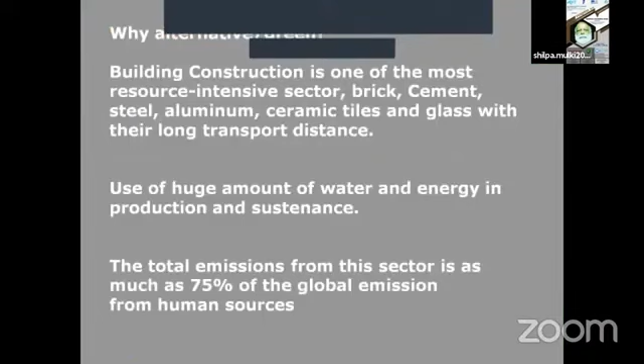So you can. Subasa, am I audible? Yes. Clear, right? But I'm not. You have to put the screen on. Yes, sir. You can see me on the screen? No. No? No, it has changed. I think something. Okay.

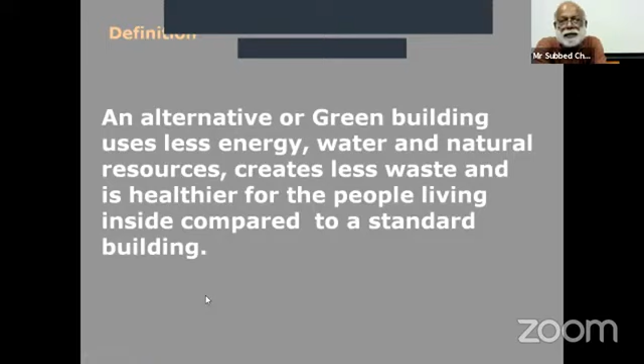Next. So now the question is, why do we need to get into this whole area when everything is going smooth, although we know there are problems with the environment and other things?

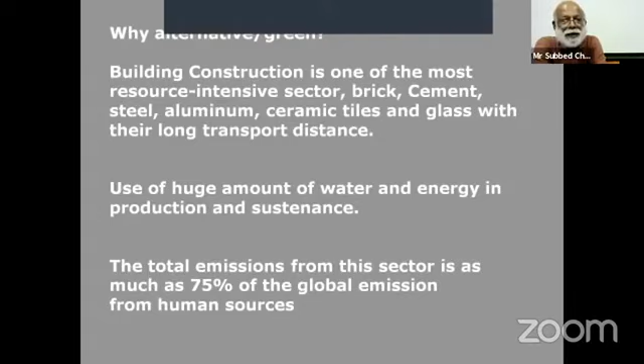Building construction is one of the most resource-intensive sectors, where brick, cement, steel, aluminium, ceramic tiles, glass, and all this material are transported over long distances and processed in large industries, which consume huge amounts of energy and water for their production and sustenance. It also consumes huge amounts of our pristine forest area.

The total emission from this sector sometimes goes up to nearly 75% of global emissions. Although as architects and engineers we always behave as if we are doing great work for society, each of our decisions and selections of material actually leads to a lot of different kinds of impact on the global environment.

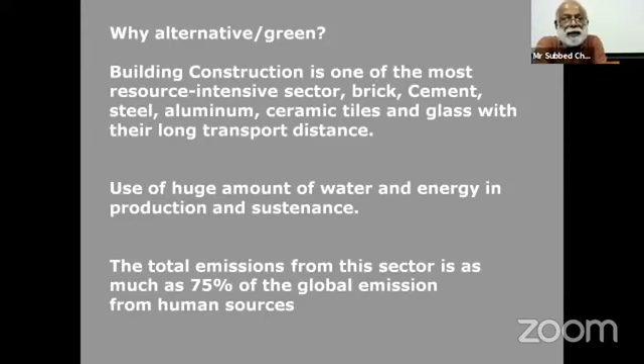Now, this also brings out a huge number of people from the rural hinterland to the urban areas. The urban areas are also an outcome of the kind of development that we are talking about. And then we don't house them properly, so they somehow manage to live on the outskirts of the cities, and they are the people who actually build the cities and the kind of developed world that we see.

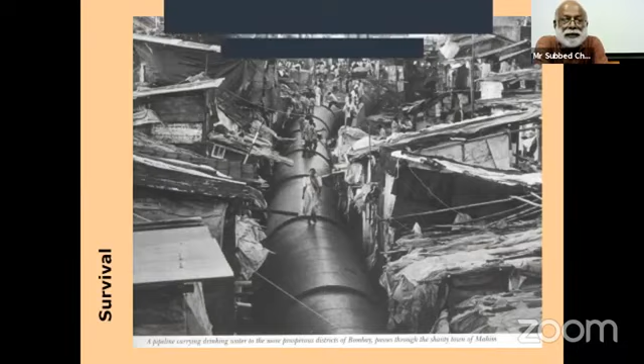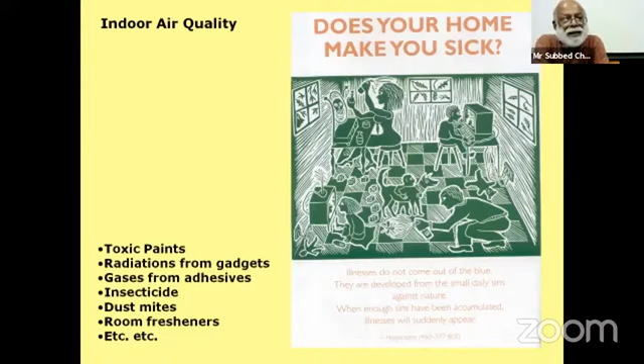But the people, those who are building or living in large apartments or houses, are we all living a very healthy life? If we look at the picture, we'll see that we are actually surrounded with toxic paints. We have radiating gadgets, gases from adhesives using toxic gases, insecticides, dust mite, room freshener, everything has a kind of bad health impact on us. Now, this is the kind of indoor space that we create.

And the model that we have in our mind, particularly our politicians and engineers and technocrats, those who go abroad and come back with this kind of image that you see, is that we like our cities to be like that.

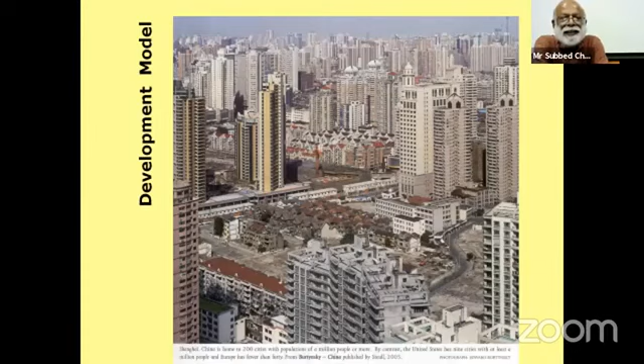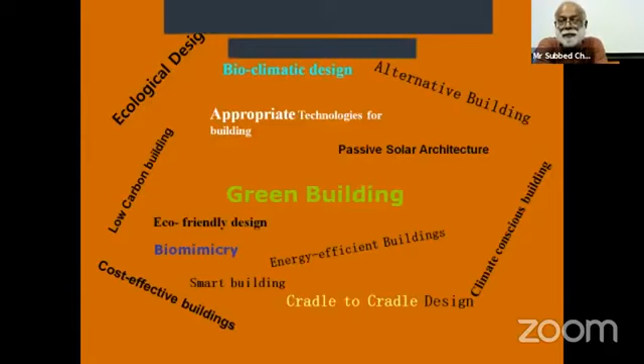Now, then there are reactions, and we start thinking about how to correct it. So lots of new ideas come into picture, and we name them in different ways. Somewhere we call it ecological design, low cost, low carbon building, green buildings, eco-friendly designs. But they are all different names for the kind of things that we like to achieve, to solve the problem of what we have created ourselves.

Now, the whole issue starts technically with the energy in building. One type of energy is embodied into our building. The type of building that we see, the steel, concrete, and all this, has got a huge amount of energy embedded within. Then we have the energy used during construction.

Today, we use a lot of equipment and heavy machinery to erect our buildings. Then we have operational energy for services like lighting, ventilation, and AC, and all those things which are very common now for our lifestyle. Then we have maintenance and alteration—those buildings need a lot of it. And then lastly, energy for demolition and recycling. All those things. Now, see, we have created such a huge problem.

And this energy, ultimately, whenever we consume it, we actually throw off a lot of waste energy, which heats up the whole environment. So it is very essential for us to select what technology we will use, what material to be used for future construction.

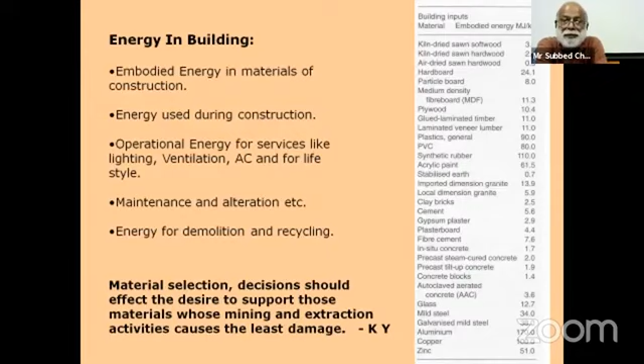Now, in the process of extracting this material, we are actually creating a huge scar on the face of the earth. Somewhere we are scooping it out, somewhere we are tracing it out. And as we look at the earth from the top, we see all these things happening all around our cities. What we are doing is a kind of exhausting the finite resources of building material.

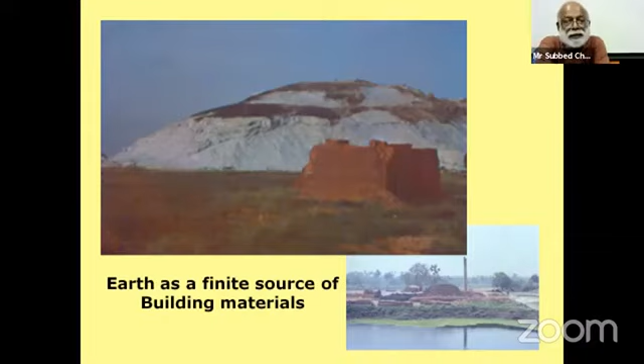But do we have a way to come out of it? Now, we do have vernacular wisdom. We still have our villages where we can go back and look at the way people lived for hundreds of thousands of years. They do have some kind of understanding of their local climate and material and its performance. It is worth still looking at some of them to draw some kind of inspiration from.

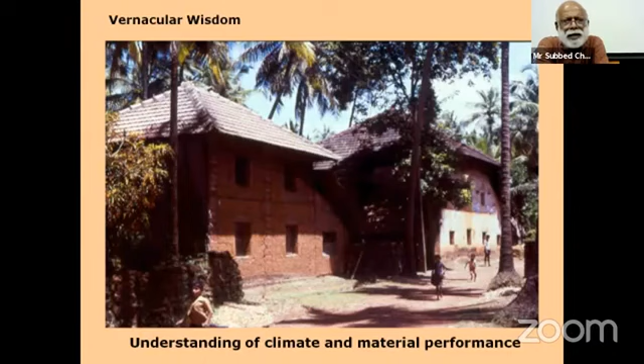Now, there are examples where people, those who have set these things for us, have provided examples for us, and perhaps Gandhi, when he decided to build his own ashram in Wardha in 1936, used local material like bamboo, mud, and tiles for his own ashram. And that is still very much there at Sevagram Wardha, which one can look at and draw inspiration from.

Next. There are buildings also which are big and multi-storied, and one such building is a guest house in Sri Aurobindo Ashram, and this is known as Golconde.

And this is one building again which has a tremendous impact on us, because it actually responded to the climatic context that we have. It can open up from everywhere to provide the ventilation, which is a very important need for a hot and humid climate. It's not the AC which can solve all our problems, but without much energy, we can still negotiate with it. This example shows us that. Next.

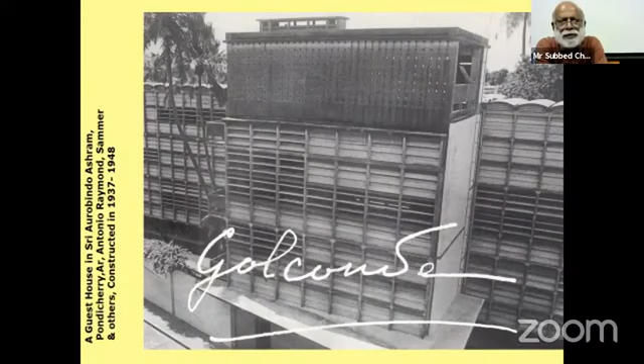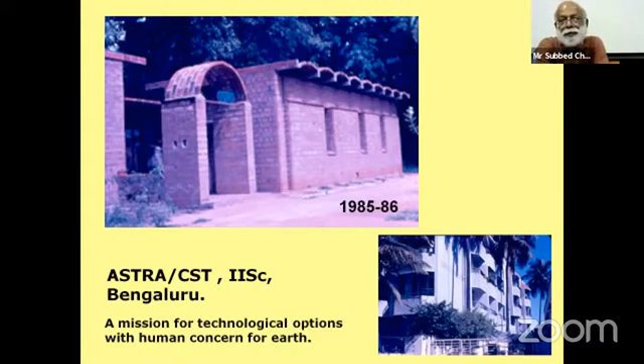Now, in the 80s, we have a group of professors from the Indian Institute of Science, IISc. They formulated a group called ASTRA, which is known as CST nowadays. They started working with some of the technologies and ideas which perhaps can help us to come out of this, or to solve partly some of this problem. And I happened to associate myself early with this group in the 80s. Next.

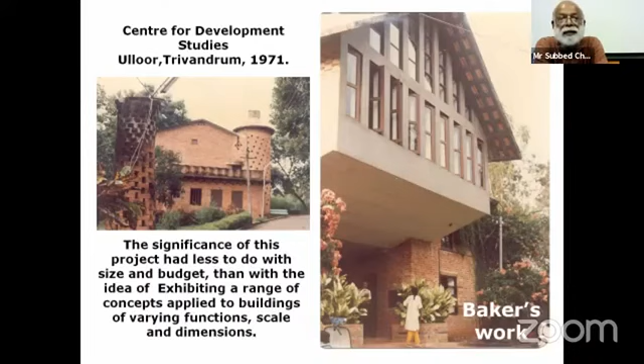There are people who also have set the stage for us. Laurie Baker is one of them. In the 70s, he started working in Kerala. He contributed quite a lot in terms of his work, and he has done a lot of building using efficiently the local resources like brick and tiles. So again, to respond to the local climate, these buildings were open enough for ventilation, things like that. So they worked as a very important exploration for us to draw inspiration.

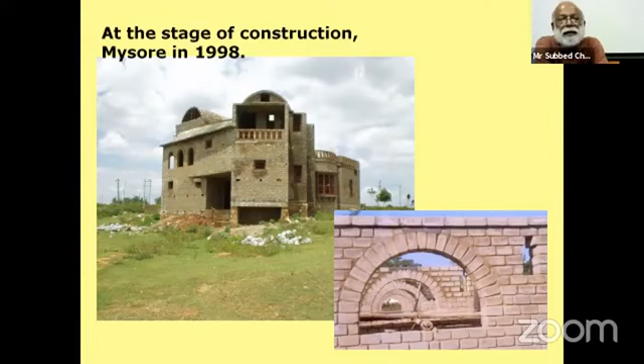So then onwards, we have our own buildings coming up in different places of Bangalore, Mysore, and other places. Next. Here's one example from Mysore. You can see the vaulted roof, you can see mud block, which we'll discuss later. Next. Next.

There are lots of other issues starting with the building and building materials. One of the things is water. We have a problem of water, and we don't sometimes think that we are creating any problem by building a different way. But if we look at the consumption of water in production of these materials, like 1 ton of cement, which consumes 3.6 tons of water, or 1 ton of paper, which consumes 270 tons of water. Steel uses 300 tons of water.

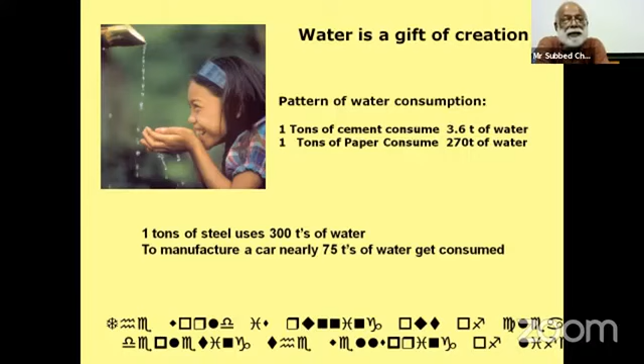Now, these are something which is very mind-boggling, basically because very rarely we have time to look at some of this information to understand what kind of problem we are creating for society when we use this material, or rather misuse some of this material. Thanks.

We do have quite a lot of faulty designs in our buildings, like the toilet system that we have, the WCs, which consume a huge amount of water, the water which is very precious, treated for us. This huge amount of water is used to push the solid material out into the pipe, ultimately into the sea or river or wherever it is. Very rarely it gets treated. So we need to think about the type of use of water and all these things, and it all originates from inside of buildings. Next.

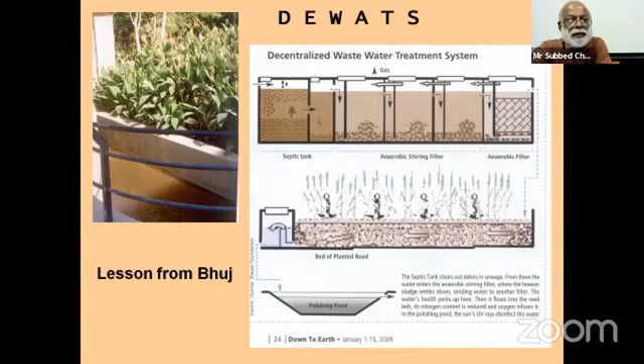We do have new ideas coming up to treat some of them, and we need to look at some of these things for our future. Next. We need to relate it with our food production. We need to have kitchen gardens and other things so that we can consume locally.

We need to also think about how we travel to our workplace. I think the pandemic has taught us this lesson. We were all talking about working from home. This is the time that has forced us to look at these options. So we can select these options of working in a place which is very close to our office, and work as much as possible to reduce the amount of vehicles operated on the streets. Next.

Next. The kind of city that we create by following the Western model, particularly using vehicles and traveling to the office, creates a huge amount of parking lots all around the city, and it demands these spaces. Now, if we work from home, we'll suddenly realize that our cityscape is changing, and that is something which can happen in a better way. Next. But there are interesting examples also coming up now. Next.

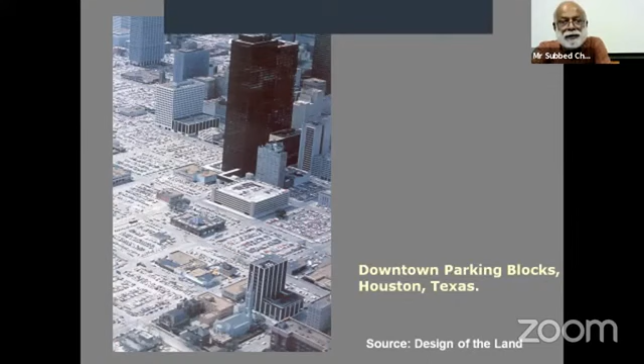You have smaller countries, those who have opened up these issues and created a lot of interesting situations where people can ride bicycles within the city, where the roads are blocked for traffic and opened to the walkers and the bicyclists. So these are some of the hopes that we have for the future. Next.

Ultimately, we are looking at a situation where we would like to have a green city, but we have to go through the green neighborhood, and it starts with green architecture. So I'll come back now to the architectural part of it. Next. Next. Next.

Now I'll start with the journey, my journey with Gram Vidya. Gram Vidya is an NGO which is dedicated to building research and training. It started in 1988, and today we are still working on it. Next.

So we will look at certain technologies and their contextual adaptation, which is meaningful based on the context that I have created with my earlier presentation. In our center, we are looking at earth-based walling materials and construction techniques. And we are also looking at different developments of masonry roofing techniques like domes and vaults, improved RC roofing techniques, beams and panels, and ferroconcrete. So these are some of the things I will touch upon, mainly by way of example, not going into the intricacies of the technology. Basically, that would take a long time. Next.

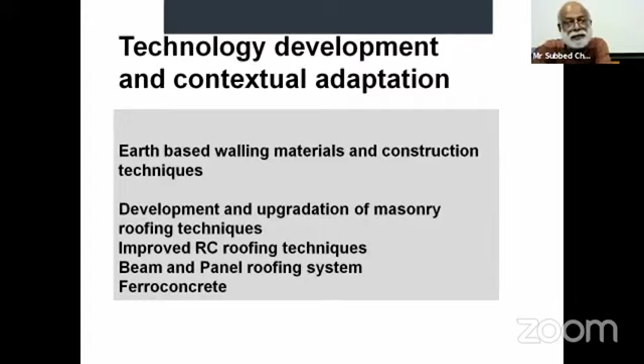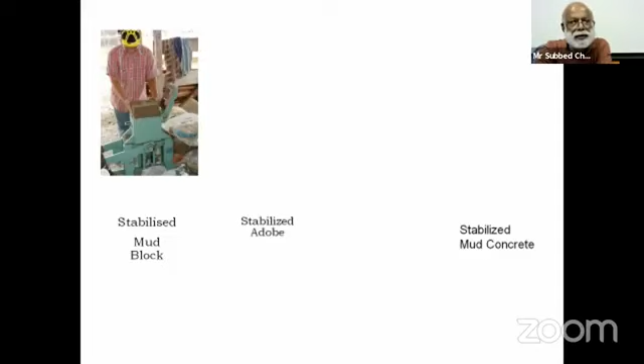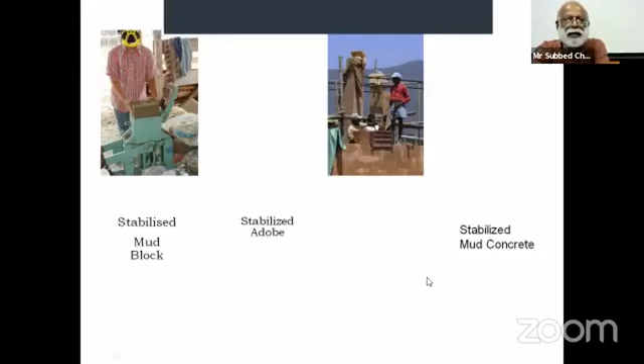So the kind of thing that we are working on starts with the stabilized mud block. Next. Stabilized adobe. Next. It also covers rammed earth. These are different techniques using mud or earth as a basic raw material, and stabilized mud concrete at the end. Next.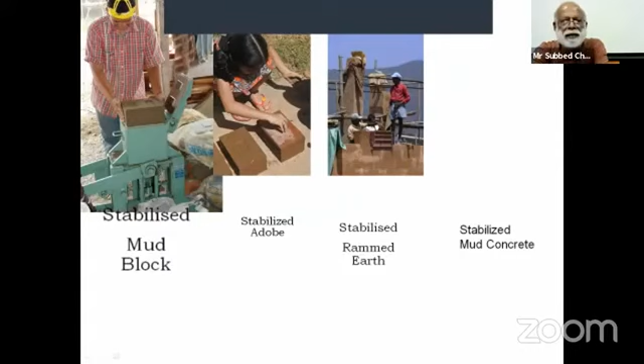We'll discuss now a little about the stabilized mud block. This is an earth-based product, which is actually compressed earth using a hand-operated machine. Next. With stabilization, which is in the form of around 7 to 8% of cement and a little lime.

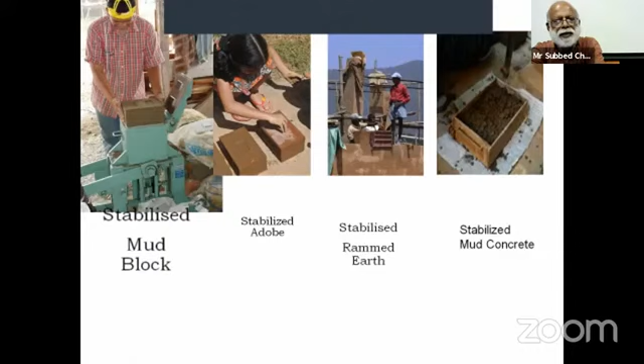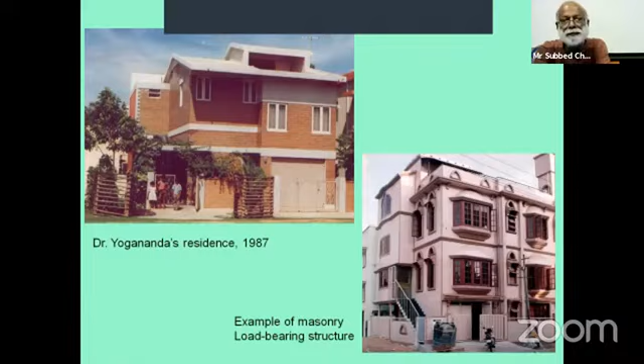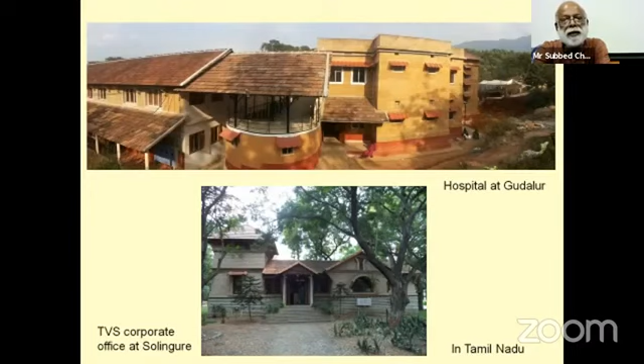Next. This is also to show you that this material can be used even for buildings like hospitals. In this case, it is 2-story hospital blocks in Gudalur, which is a high rainfall area in the Nilgiris. We also have a corporate office in Solingure, which is a group of people's office building. So you can see the acceptance in the corporate sector. You can see its acceptance in the NGO sector, where we're doing hospitals. Next.

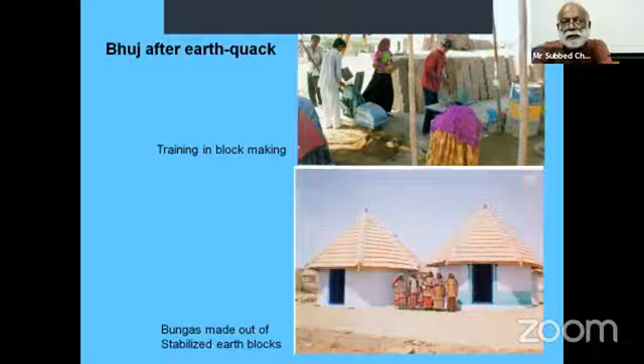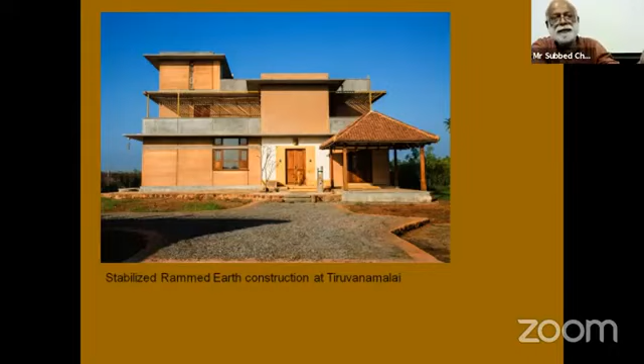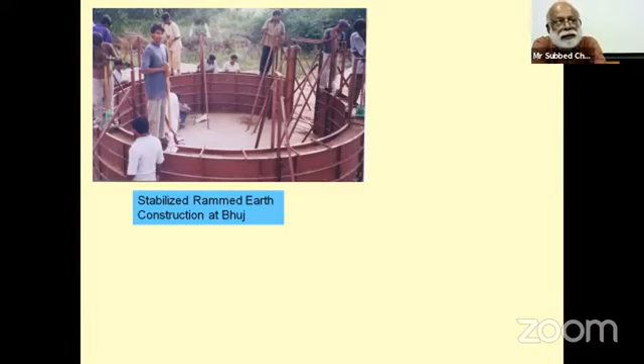Stabilized rammed earth construction in Tiruvannamalai for a residence. Next. Rammed earth is also used in Bhuj, where the whole house could be built with simple formwork. And since it has been used thousands of times, they could actually create a single formwork for the whole building. Next. And they could build the bunga, the traditional kind of house construction. Yeah. Next.

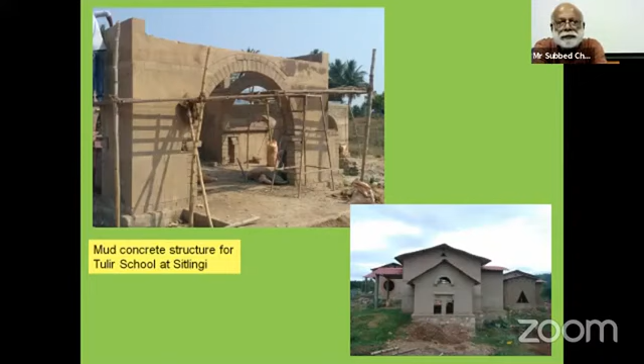Very recently, we did a Goshala in Mangalore. This is one of my early works here. And this is standing on mud concrete pillars, which use the recycled product, particularly the waste that comes from laterite block making or squaring. At the site we have lots of this waste, with a little bit of mud, cement and lime mixed together and cast without steel. These are without steel. Next.

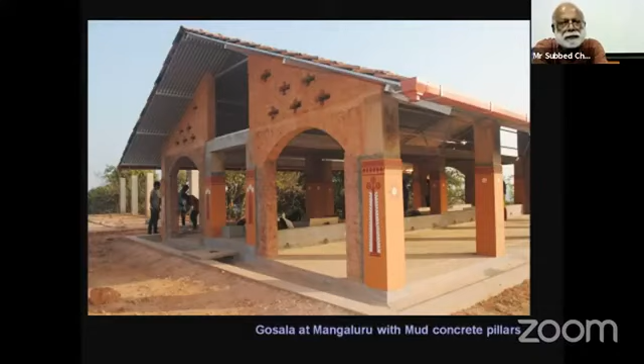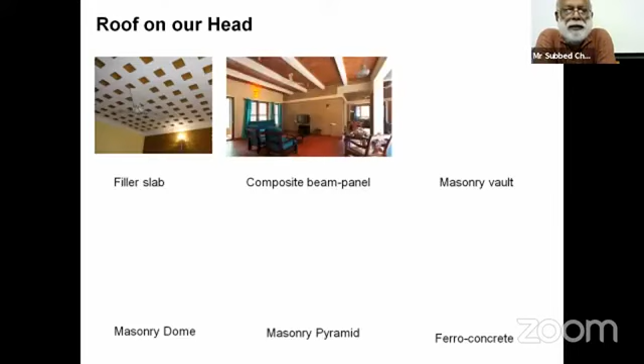Then we come to the roof, and in roofing there are filler slab, composite beam panel roof, masonry vault, masonry dome, masonry pyramid, and ferroconcrete. All these things we'll touch upon with one or two examples. Next.

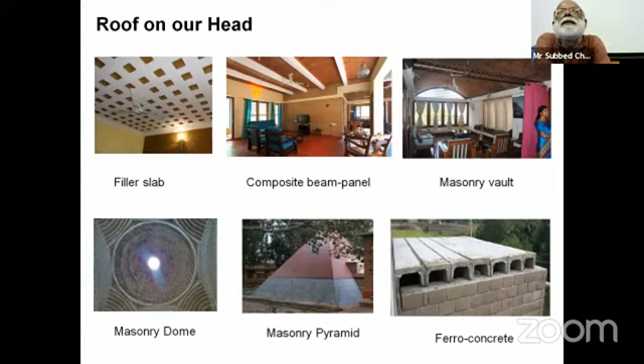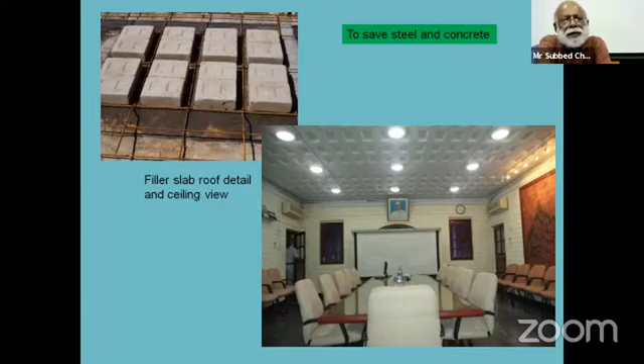You can see here, filler slab is nothing but a little modification of the existing RCC slab. Here we replace some amount of the concrete with filler material, which can be brick, block, any light material or recycled material, because we don't expect much strength out of it, and we are replacing concrete which is not doing much here. That is why it is called filler slab. You can see the construction technique where the steel is passing in between those blocks, and you also create a very interesting ceiling pattern in the process. Next.

We can also use a variety of building materials for filler, like waste or recycled tiles. Actually, Laurie Baker started using these tiles, which come out of Mangalore tile production but are not the best quality, only 3rd or 4th grade, already having some cracks. We can also use products made by village potters, and all these things can create employment and a new type of architecture. Next.

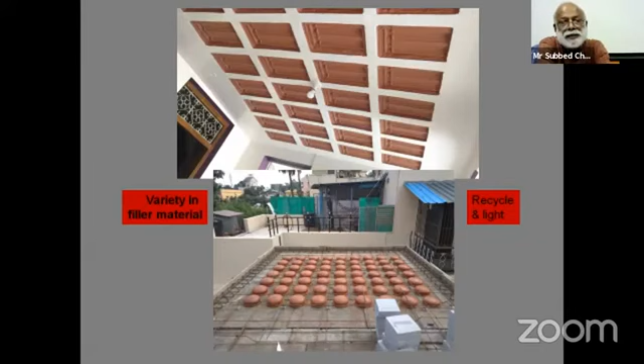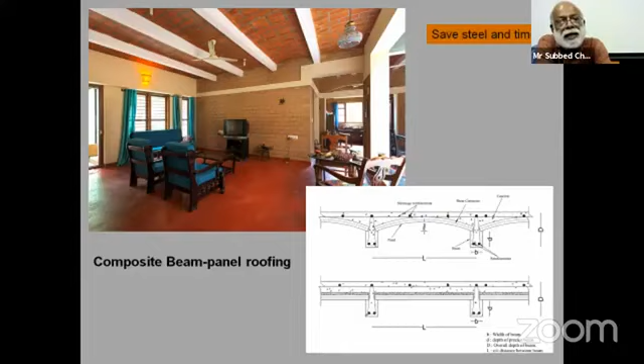The next one is a composite beam panel roof. If we look back to our history, before RCC took over, we used to have roofs like the jack arch roof and Madras terrace. If we draw our inspiration from that, there is a possibility of creating beam and panel. The beam can be steel, RCC, or also made out of timber. Then we can create panels out of bricks, tiles or stone slabs and create a beam panel roofing system. This is a designed roof, and it saves steel and time if we like to prefabricate it.

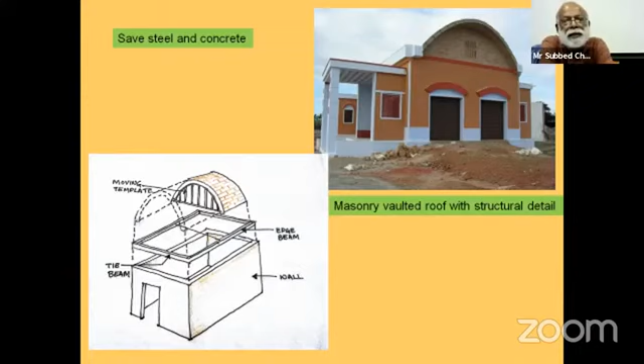Next. You see that you can also play around with the geometry of the vaults. This is from Vellore. You can also use it for thermal performance, like a double roof: a roof below made out of mud blocks, and a tile roof on top. A double roof will provide a lot of thermal comfort, particularly in areas where the temperature goes close to 40 degrees. Next.

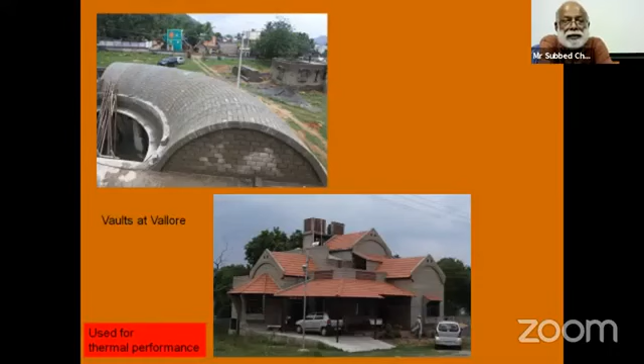There are also large vaulted structures where we have used the vault also as a kind of a floor slab, and its potential can be explored. And this is an example from a house very close to Malpe Bridge in Udupi. Next.

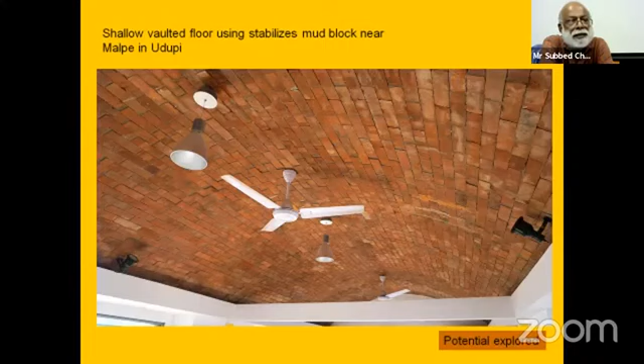There's another example in Mangalore where architect Nitin Jain was involved. We also, just as consultants, visited the site for making mud blocks and also for the construction of the dome. It's a 30 feet diameter dome with mud block, and the whole house is planned like that. Next.

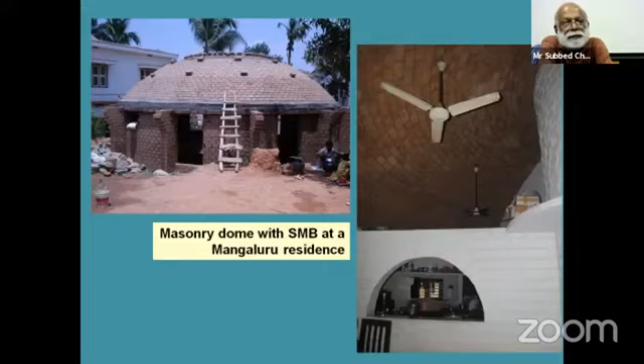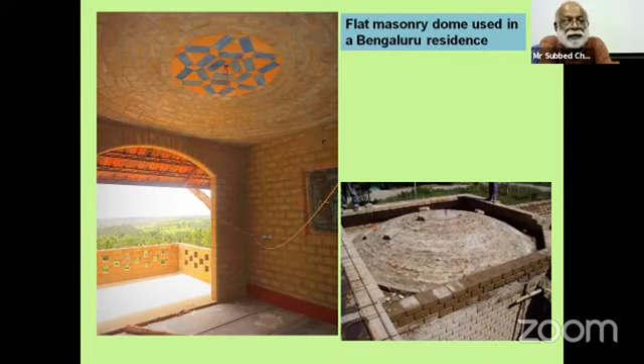These domes also need not be very high or spherical. They can be very shallow so that you can build another floor on the top. Historically, these kinds of examples are very much there. And again, we have revived some of them with proper design. Here is one example of the residence. Next.

We can also do a pyramidal roof using mud block. Here is another example from MCE Hassan, where we have used old timber frames to initially support the roof and used mud block again for creating the pyramidal shape for a meditation center. Next.

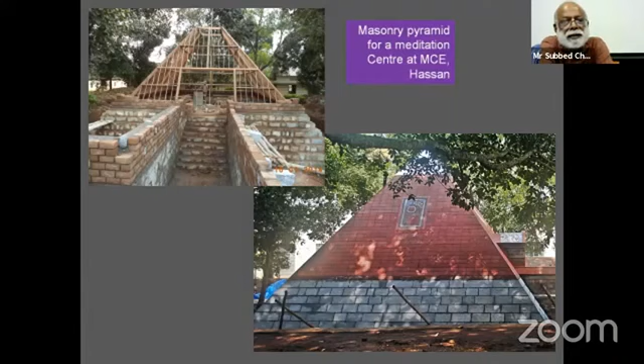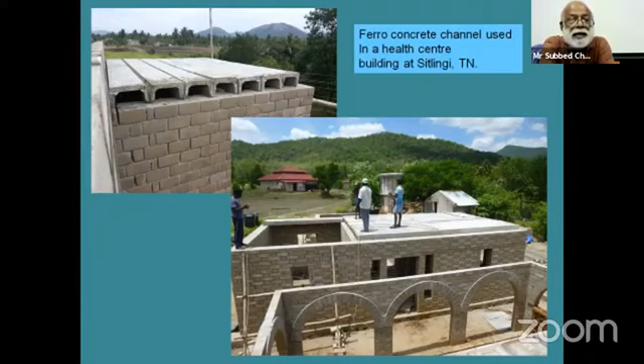The last thing that we'd like to discuss is the concrete ferrocement channel, where we use a very nominal amount of steel in the form of chicken mesh and a few rods. We can precast elements like channels, and then lift and place them side by side to create a system. This is lighter, saves a lot of steel and cement, and can be erected very fast. This example comes again from Sitlingi Health Center, a hospital building using the same. Next.

Now, the last thing that I'd like to discuss in the last 2-3 minutes is that, as a group, we are interested in research, training, and development, and also execution in certain cases. But the area that we feel today is very important is sharing our experiences with younger children, starting from school, college, to whatever age. But the thrust is very much with the younger.

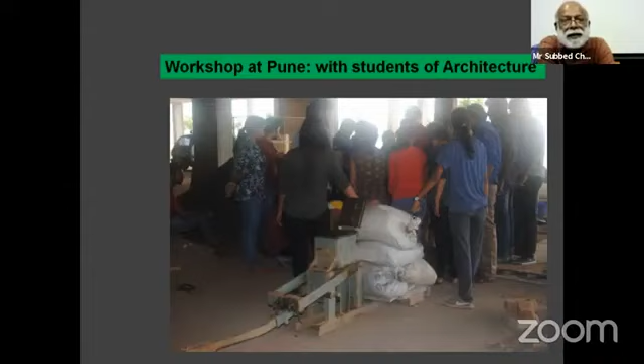And this is our regular training program activities. In Bangalore we have been doing it for the last 3-4 years. Before that, I was associated with the Indian Institute of Science and our Gramvidya program in Bangalore. In both places we still continue with this training program, where people from different professions can come together and put their hands in to understand and build things on their own. So this is something very critical for us.

And in the end, I'd like to say that I'm touching only a few small things, but ultimately it is your lifestyle. Unless you change, you won't be able to appreciate the value of it. When you build a house, there are so many components, starting from openings, foundation, finishing. And today we are kind of seduced by all kinds of materials coming into the picture. They are not only costly, they are also very energy intensive. So one has to be very careful about selecting those materials and technologies if you build. And if you select the alternatives, you are closer to working with the earth to protect it.